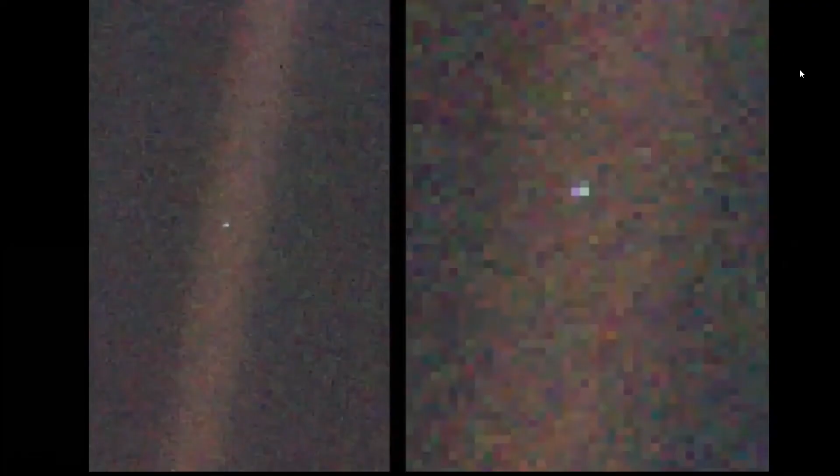I'd like to first take a look at the really big picture and step out. This is a picture that inspired me when I was a young kid. It was an idea Carl Sagan had as the Voyager spacecraft was leaving the solar system after visiting Neptune—they turned around the camera and took a picture back looking at Earth. So this is everything we've known, everything we've loved, even very close at the edge of the solar system, on the grand perspective, everything fits into a single picture. It's kind of a powerful image.

And when we zoom in, it's more than a pixel to us. It's our home, and it's this lovely planet. How we build and how we take care of the planet, even as we think about how we step away from it and venture out into the universe, is super important.

The way we approach a project like space travel would be in collaboration, we believe. In 1936, our founding partners, Skidmore, Owings, and Merrill—SOM—had exactly that same idea. First it was Skidmore and Owings, two architects, who were joined by Merrill, an engineer, shortly thereafter. Ever since that, this has been in the DNA of SOM.

Skidmore and Owings got their first break at the Century of Progress exhibit in Chicago in the mid-1930s. It was a big fair, and they realized this incredible skyride project that you can see on the screen here. It was used by about 5 million people, almost in a time where air travel was not standard. This was probably as close as somebody could go before planes or space travel were readily available—you were in a capsule riding 60 meters up over the water.

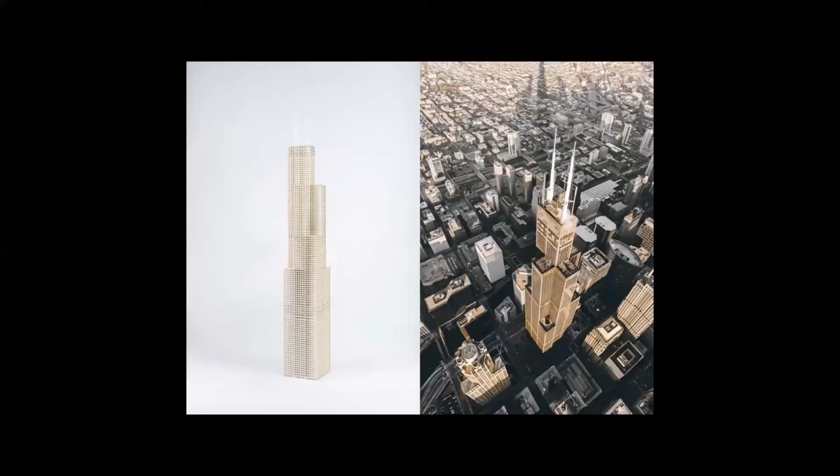Skidmore, Owings, and Merrill, the engineer and the architect, then Fazlur Khan and Bruce Graham, and then all the next generations that came—architects and engineers working together. We believe this setup produces the best architecture and best engineering. But we don't just do that—we also have designers and urban planners on staff. When you look at our architecture, for example the Willis Tower, formerly the Sears Tower, in Chicago, you can see the architecture derives itself out of the structural engineering and vice versa. This is a bundled tube concept from Fazlur Khan, a world-famous engineer of his time.

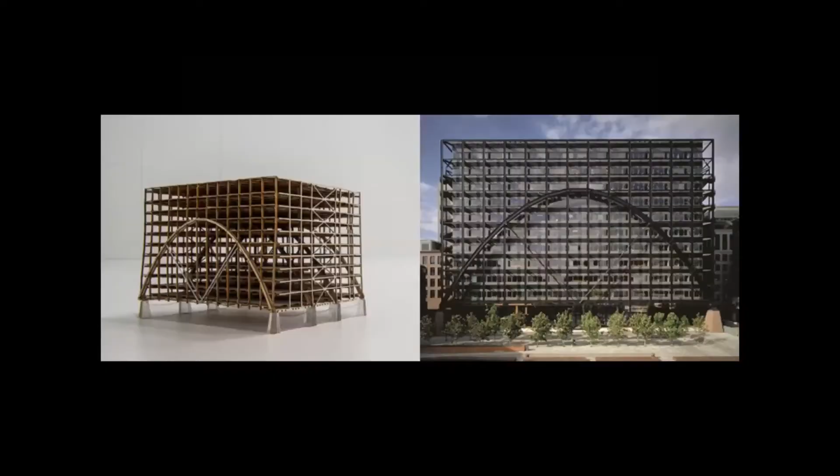This is a great example of how we see a successful project, how we like to work together. Another example that shows this collaboration, which we at SOM really love, is the Broadgate project, the Exchange House in London, 1990. It is a bridge, but it's also a building—you can see how it spans over this big area, which is occupied by train tracks underneath. So again, architects work together with structural engineers in collaboration. We believe space travel is another one of these projects where we have to collaborate in order to have a good outcome.

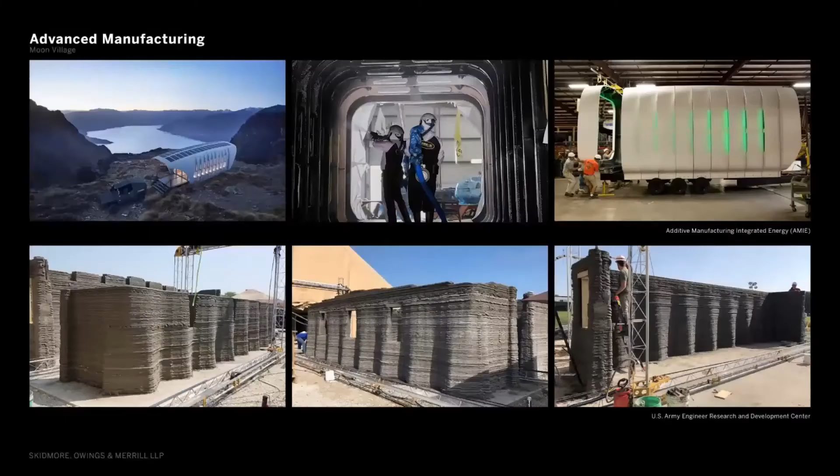Besides project work, we also do a lot of research. We try to stay at the cutting edge of technology, of building production—additive manufacturing that may be applicable later on the Moon is something we're looking into. Ever since computer technology made its way into mainstream architecture and structural engineering, we have been right there with it, and we've always used the tools of the time—whether it was AutoCAD, Revit, Grasshopper nowadays, or all these different types of tools and platforms, we have utilized them.

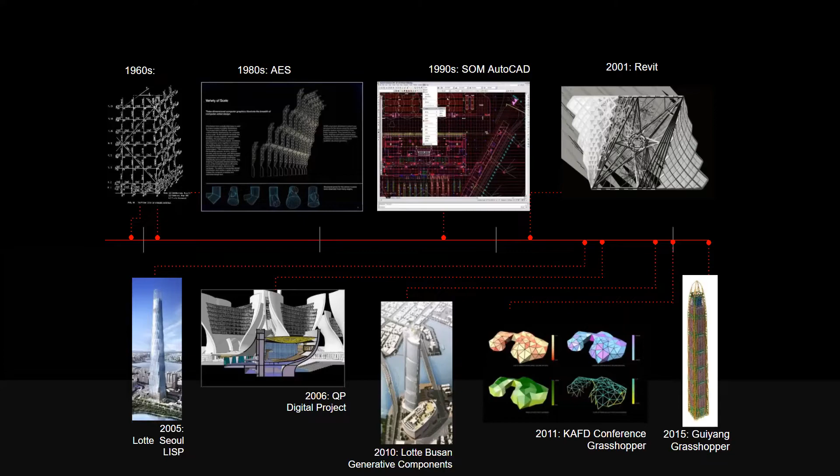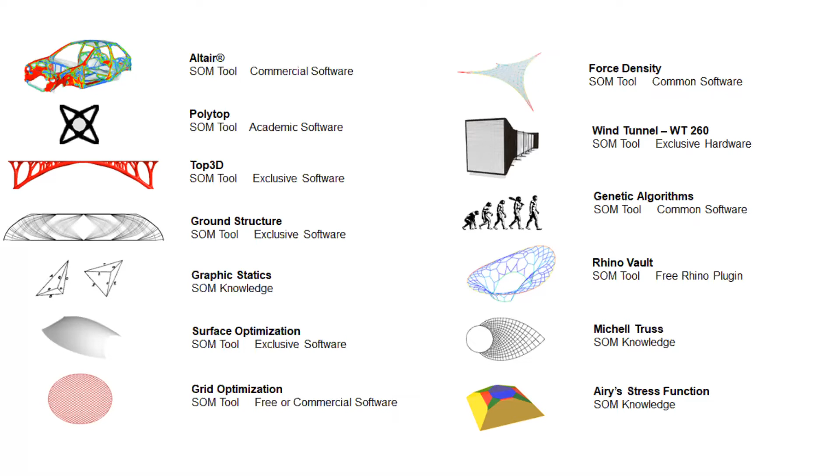However, when there was no tool available to us, we would just develop it ourselves. There's a whole list of tools that were authored by SOM over the years, and they make our engineering usually successful. Architecture profits from this too. A lot of engineering tools have been developed by SOM, and so we're taking this cultural history of our project and our way of working and applying it to designing habitats in outer space.

This wonderful idea that Jan Werner just described, of taking the inspiration of going to space together, is personified in the International Space Station, and then applying it to how we could live on the moon. Instead of going to the moon as adversaries competing, if we all pool our resources together to create a common infrastructure, then everybody can share in it, and we could all go to the moon and explore and settle it together. So SOM, in partnership with the European Space Agency and MIT, for the last two years, we have been exploring ways to give form to this idea of how we would go to the moon together.

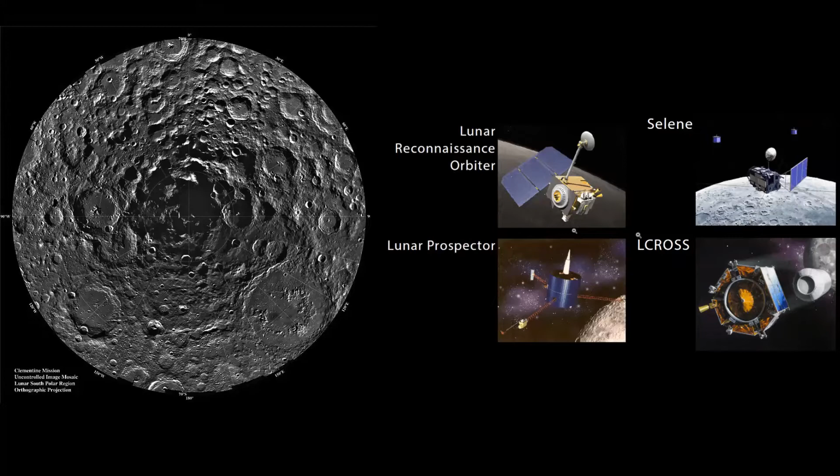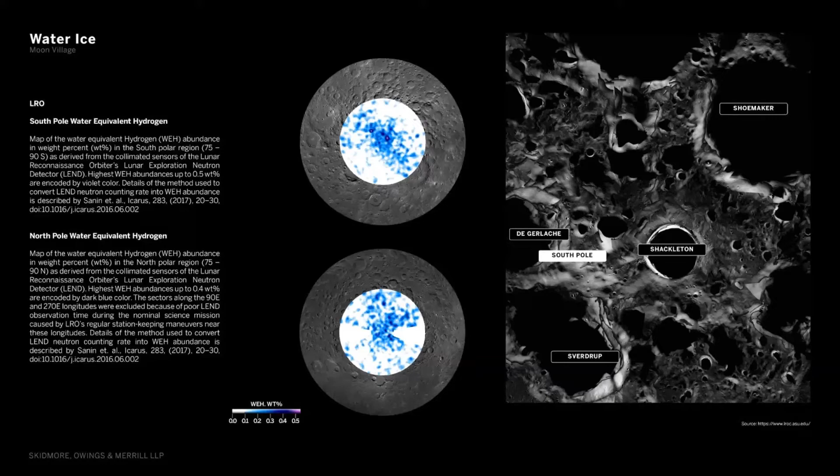We have chosen a site. Over the last 20 years, over many missions by different countries, we've accumulated quite a bit of evidence that the most interesting bits of the moon are the two poles, mainly because, the way the moon's orbit works, they have these permanently shaded regions where the sun never shines, or hasn't shone for billions of years. In these permanently shaded regions, there's very high evidence now from these many missions that there's ice, most likely water ice and other volatiles permanently frozen in a big cache of reserves.

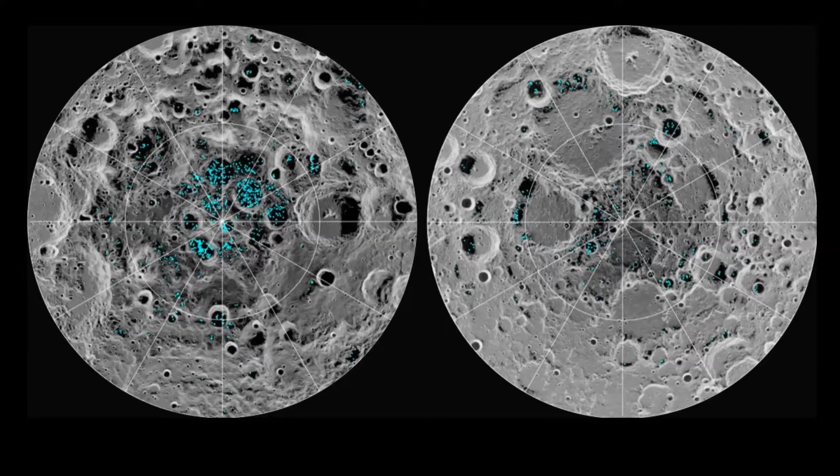The rest of the moon, on the equatorial region, where the sun shines most of the time, everything boils off, so it's bone dry. In fact, if we go on the moon and find concrete, it would be worthwhile to mine it for its water. But on the poles, we believe the water is stored in vast amounts.

In particular, if we zoom into the South Pole, besides the permanently shaded regions, also very nearby there are high points that coincidentally are exposed to almost permanent sunlight, quite the opposite. Those are really good places to harvest solar energy to create electricity. So you have water, which is interesting because it provides a resource, but it's also very interesting scientifically because it locks in the history of the solar system for the last four billion years. So it's interesting both as a resource and as an object of scientific study.

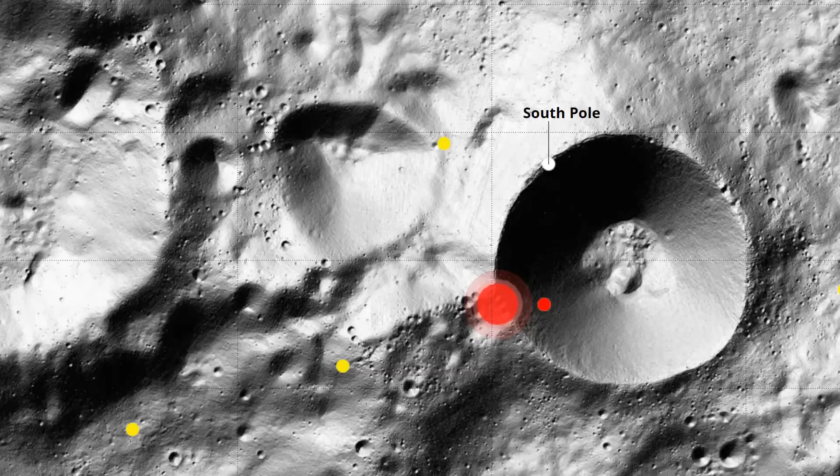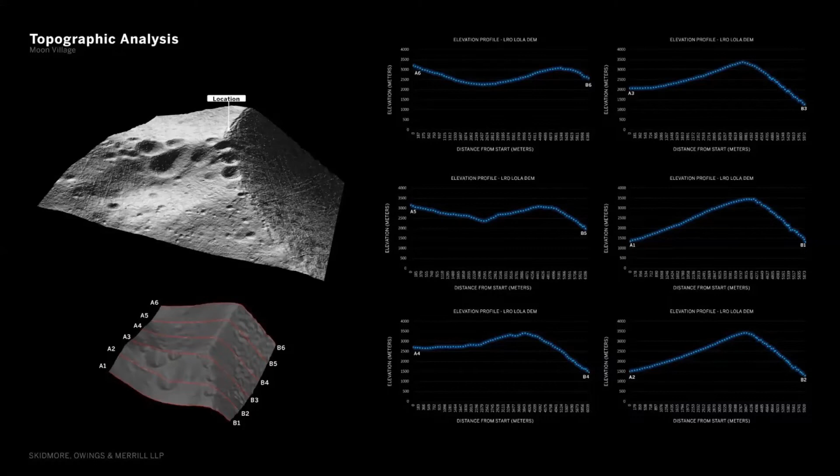And it's right next to areas with permanent light. If you look at it, there's this South Pole, and then there's this giant crater called Shackleton Crater, about four kilometers deep, about the length of Manhattan from side to side, so pretty big. But on the rims of it there are these smaller craters, which you see here on the left, where it would be easier to land and explore. You have, very near to each other, both permanently shaded regions and permanently light-exposed regions. We've studied the topography very well. There's a lot of good information, so you can build a very detailed map of it.

After picking a site, we wanted to start imagining how you would build a moon village or settlement that keeps growing over time. It's not just a one-off event.

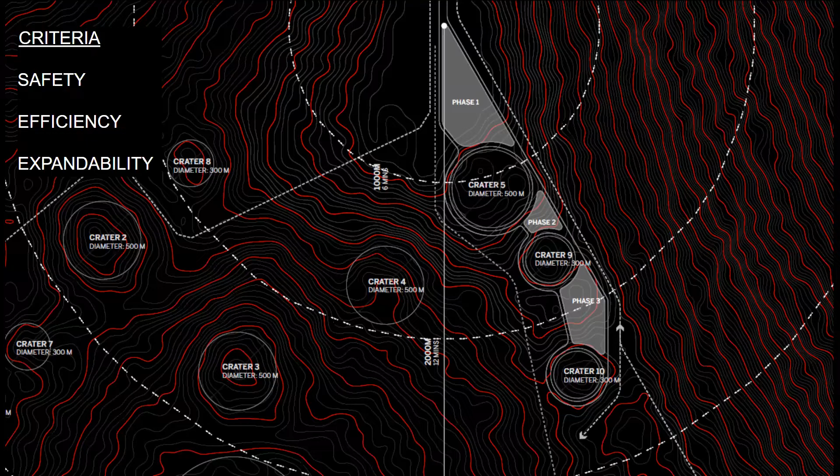When you set off to create a new urban environment, you have some criteria. You have to have safety, which is very important, because it's a very harsh environment. So all of your modules and habitats must be linked together, so if one of them goes off, it doesn't cut off the rest of your settlement from each other. It must be efficient, because especially in the beginning, everything has to be brought from Earth, and as we know, space travel is quite expensive.

So you must not lay out your infrastructure in an inefficient way. And it must be easily expandable, because our idea and the goal here is to keep growing in the future.

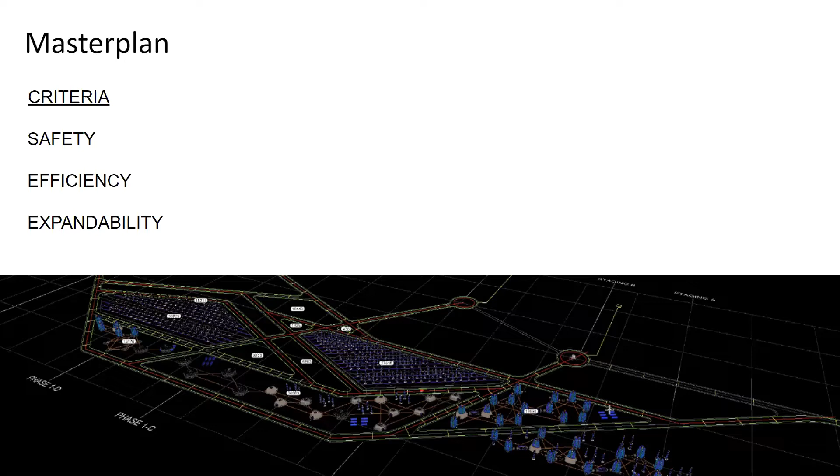So we looked at several precedents of how humans have settled on Earth before. Many places you have grid plans, both in South America, all laid out based on the law of the Indies, and then the Jeffersonian grid that dominates the American Midwest, that started expanding from the Appalachian Mountains on. These provide a lot of redundancy, safety, and expandability, but they also create, if you want habitats connected together, a lot of closed spaces you can't access.

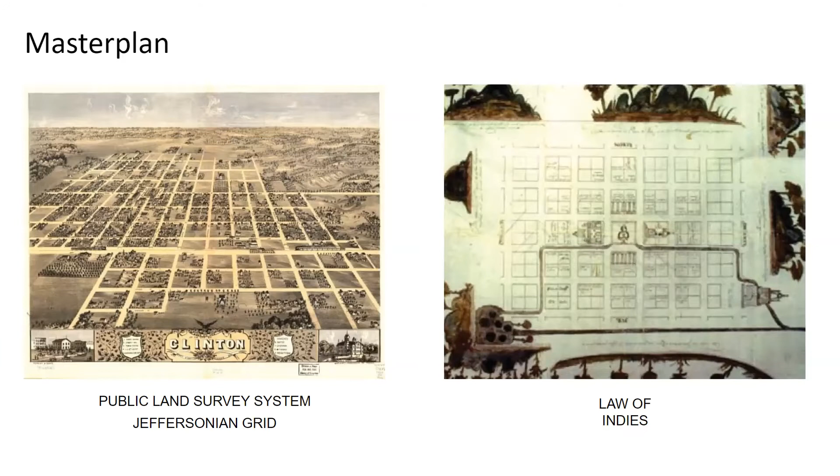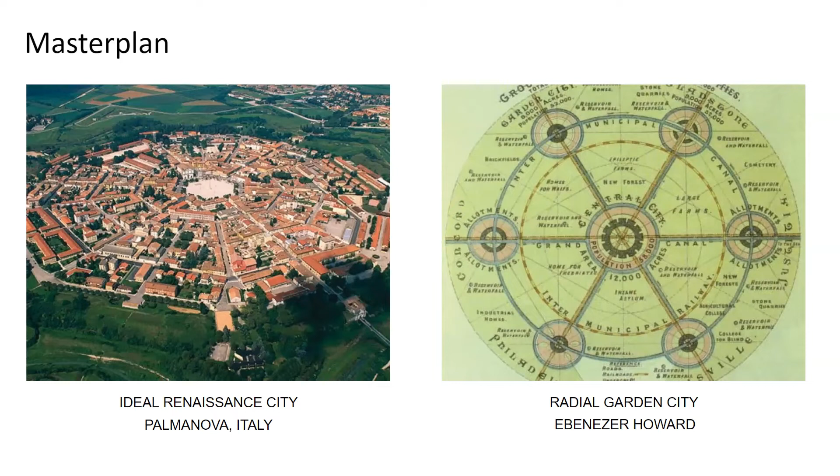We also looked at other utopian urban planning ideas, the radial garden city from the early industrial revolution, or the ideal Renaissance cities from Italy. But we settled on this idea of the linear city, first made popular by the Spanish architect Arturo Soria, and then given its most famous form by Le Corbusier. This idea of how you would use modern industrial society and lay it out in an efficient way.

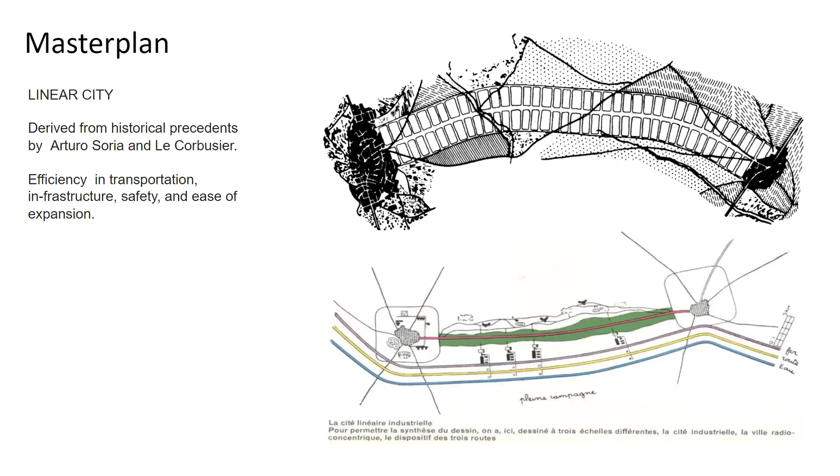So you have these bands of development where you have the infrastructure and the industry interspersed with the habitats. If you take this idea, you could have a band of habitats. Here in this master plan, the rim of the crater is east-west, left to right, and the big crater is on the south. So on the perimeter of the crater, you could lay out all of your habitats, and they could grow in both directions. Then next to them, you could have all the infrastructure you need, the solar panels, the resource extraction that grow with the habitat.

And finally, you can have an activities band. You can imagine the different players coming to the Moon Village. Say, for example, you have a government agency that wants to set up an exploration and go roving around to explore the region. They need a staging ground. Right next to them could be a tourist company that wants to bring tourists to the moon, and they could have all the playgrounds there where you would come in and experience fun, new ways, like lunar Olympic Games or things like that.

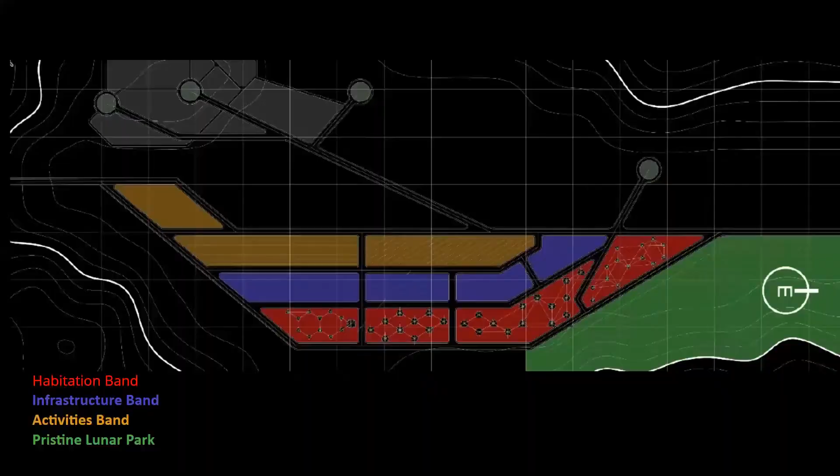And we had this idea that we probably want to have a piece of undisturbed moon left over, so that as you move around and lay tracks and make a human mess, there's always a piece of the pristine moon settled as a sort of moon park. And the best place for it is in the direction of the Earth. Because of the moon's rotation, Earth is always sitting in one spot on the horizon. It never moves, and it's always there in one location. In our settlement, it's to the right over here.

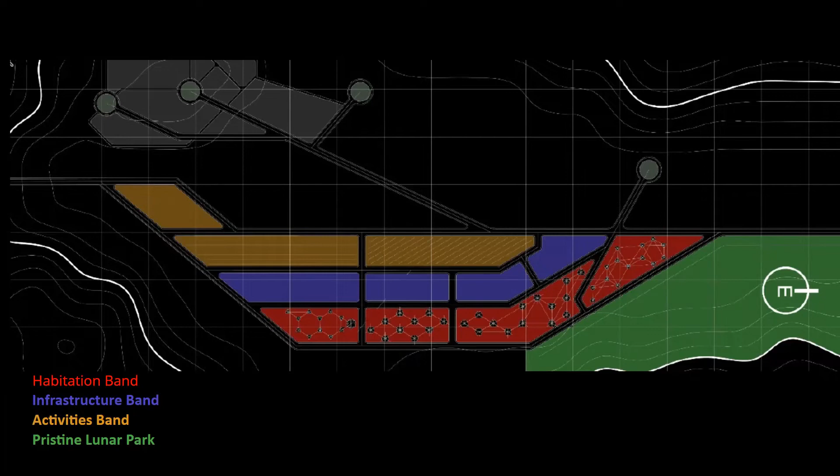And so we had this idea that if we keep this piece of pristine moon, there would be this poetry that everybody from each habitat would look on the untouched moon and then see behind it the beautiful Earth spinning around in the sky, to give it a sense of identity and beauty in addition to the rest. So if you step back in the settlement a little bit, going down into the crater, for example, you would see your settlement with the Earth behind it, always in this beautiful image.

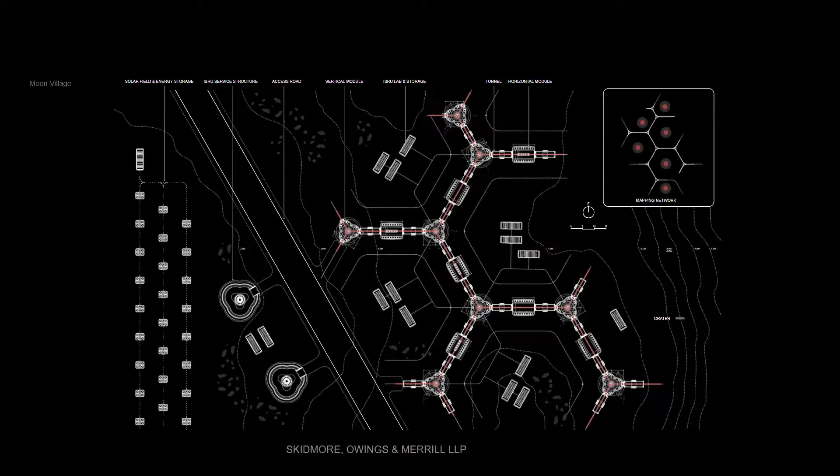And so this is sort of our idea of the master plan. We started laying out our habitats and how you could aggregate them together in this linear fashion. This is a higher up rendering from here. In this case, the crater wall is on the upper part, and you see the band of habitats growing, and then the solar panels and other infrastructure that's holding the life support.

The differences that we as engineers and architects face on Earth versus the Moon couldn't be starker. The Earth is more than 3.5 times bigger than the Moon. The average temperatures on the Moon are significantly colder and significantly hotter. As you can see, it dips down to minus 240 degrees Celsius and goes up to 127 degrees Celsius at its peak. So the range that we have to accommodate with our structures is significantly bigger than on Earth.

The force of gravity is obviously much, much less, about 1/6. And interestingly, also the lunar day is significantly longer, as we all know, about 30 days. So that is also an important criteria when it comes to the location, finding a good site, as Georgi already talked about, for harvesting the solar energy with PV cells.

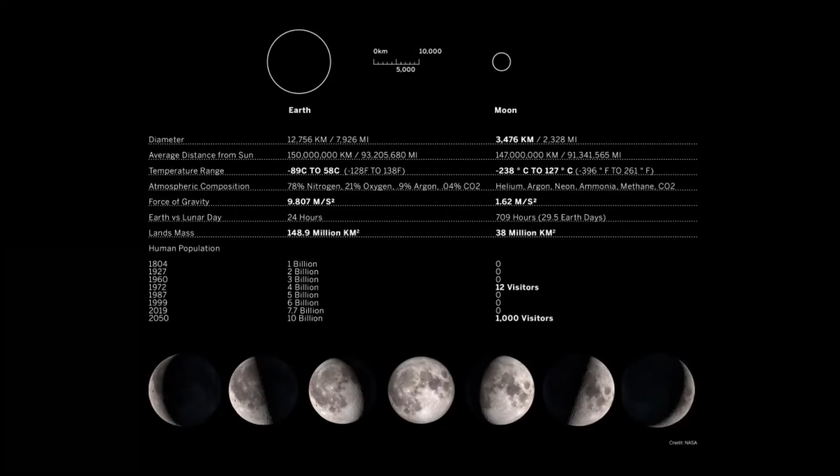In terms of what the structures will have to withstand, on Earth typically we have gravity. On the Moon, gravity is not the issue. On the Moon, it is actually creating pressure for human life. To withstand these forces, the systems that we have to construct on the Moon will have to be capable of withstanding probably 10 times the forces that we have to have them sustain on Earth. And so that is a significant difference that especially structural engineers have to keep in mind when they design on the Moon.

We also have radiation on the Moon that we have to be very, very cognizant of. There's a low-level radiation that is constant, but there's also so-called solar flares that happen once in a while and can be predicted and can be, like the weather, foreseen. And astronauts will have to take cover during these events. And so our structures also have to serve as shelters to protect the astronauts from radiation.

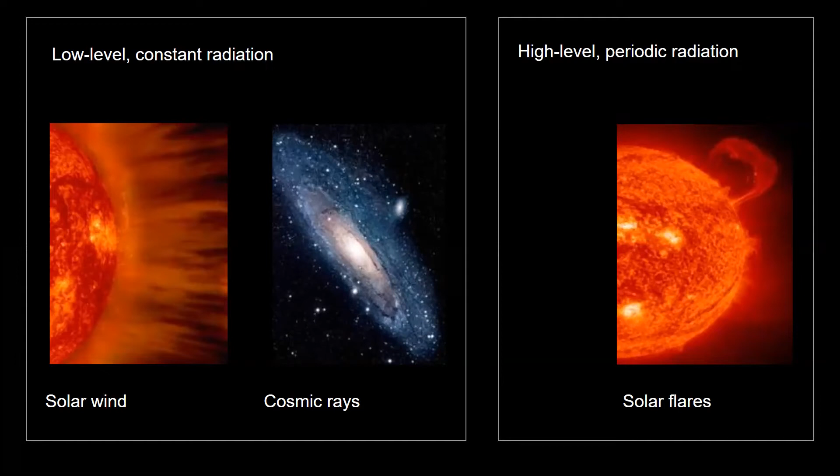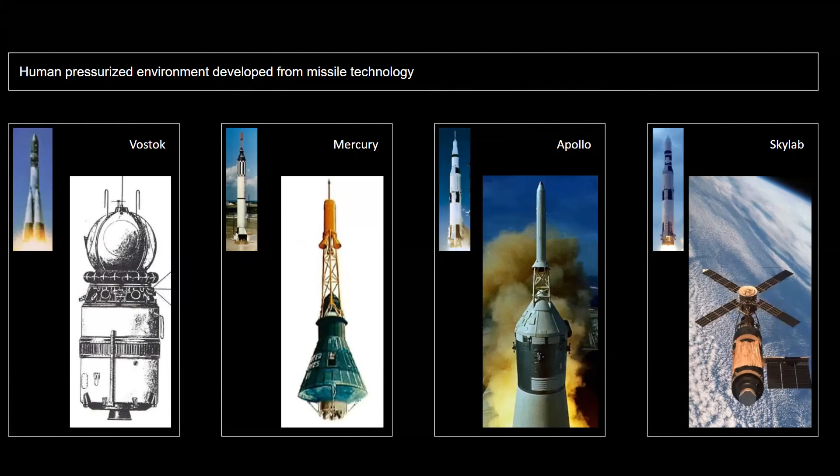Traditionally, spaceships were constructed as gigantic fuel assemblies with a little bit of payload on top. You can see the three types of spaceships we've seen in the past: the Vostok, the Mercury, and the Apollo, where there's a tiny little last stage at the top of the rocket ship that actually made it into orbit. Skylab also had its components transported into space at the tip of a rocket ship. And this is a traditional concept of taking rigid components into space that do not change their shape. The outer shape conforms to aerodynamic and structural requirements, and there's no flexibility.

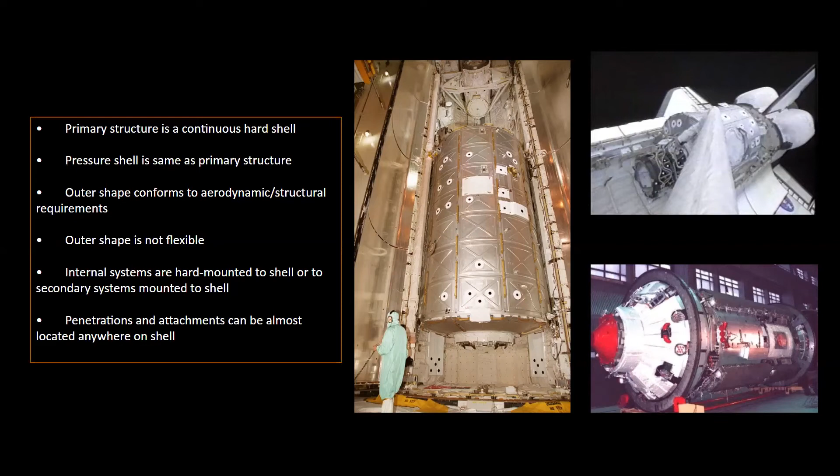This kind of old school concept has been changed, or there has been an evolution in the 1990s to be a little bit more flexible. NASA developed a system where you had a rigid core that would fit beautifully into spaceship compartments, but there was also an additional flexible membrane that could expand once the components were in space. So this was a way to be more efficient and create more space without having to build bigger rocket ships.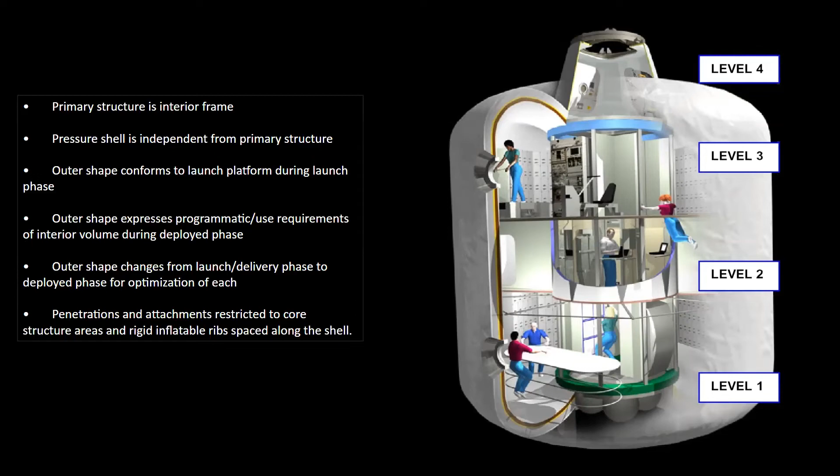And to summarize this, there are different classes of systems that scientists categorize. Number one is the class with the rigid outer shell that doesn't expand. Class two is the latest development from the 1990s, where we have flexible outer components that can significantly change the shape of the module and give you more space. And class three is the future, probably, where we use in situ material on the moon to build structures, so we don't have to take building materials up to space, which obviously is very uneconomic.

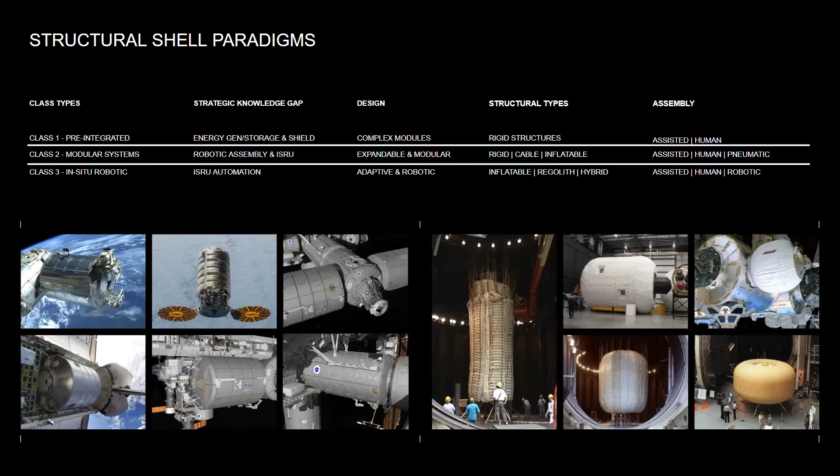So understanding all of these considerations, we synthesized and developed a scheme for the individual module. So we developed the architecture of this module.

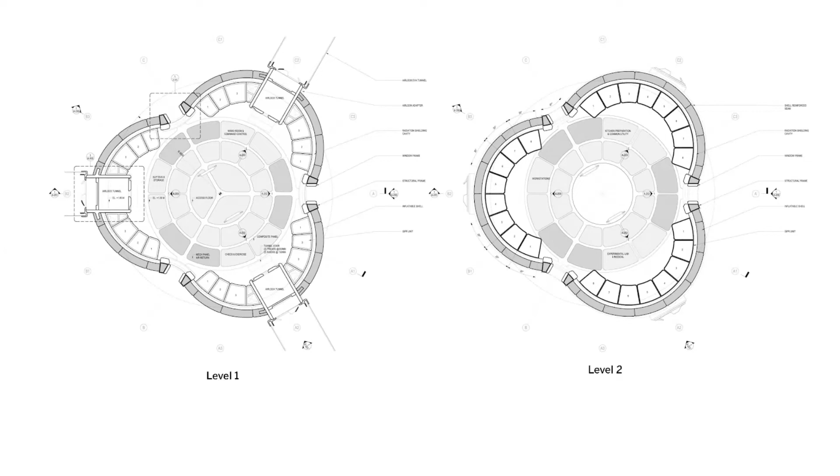Up on the second floor, we find the lab and research area, and you make your way up in the center, which has a ladder so you can guide your way up.

On the third floor, we have the sleeping quarters of the crew, where they can sleep, live, and entertain themselves. And up on the very top, the 4th floor, we have an experimental greenhouse where the crew is trying to learn, hopefully, how to grow plants while being on the moon.

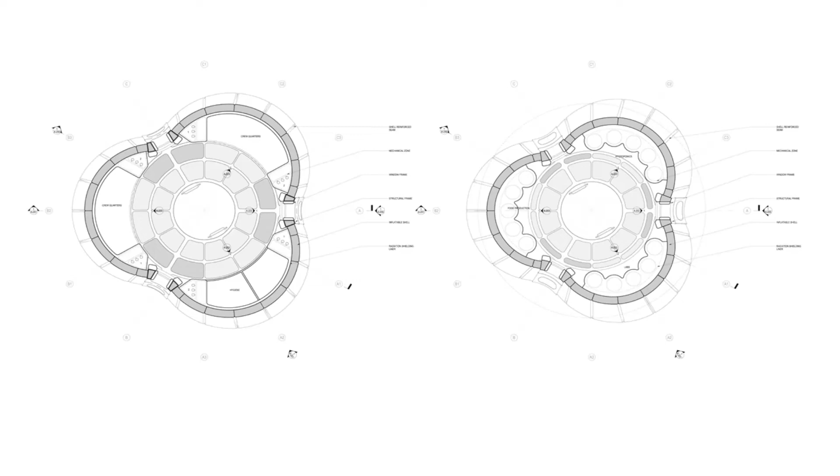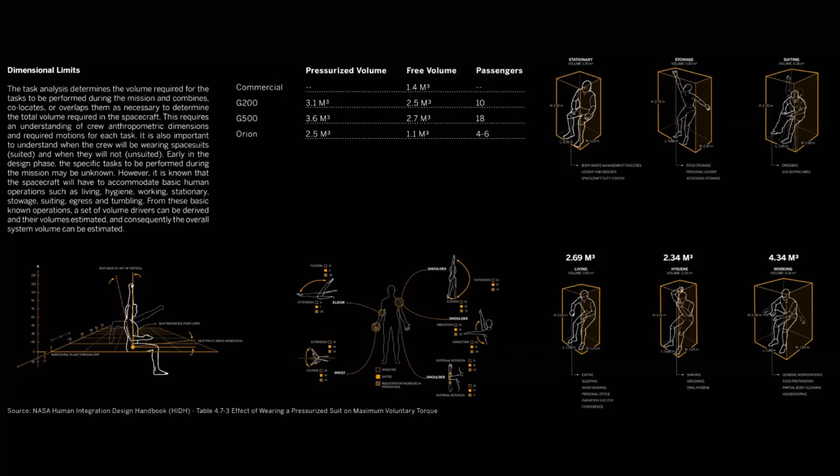On the moon or in a module like this, every inch matters, every ounce matters, so the study of the human body is particularly important. Taking into consideration the reaches and typical dimensions of the human body, we designed and programmed the system, and you can see how it's broken down into the circulation in the center, which is a new idea here, to have a rigid frame around it but circulation in the center.

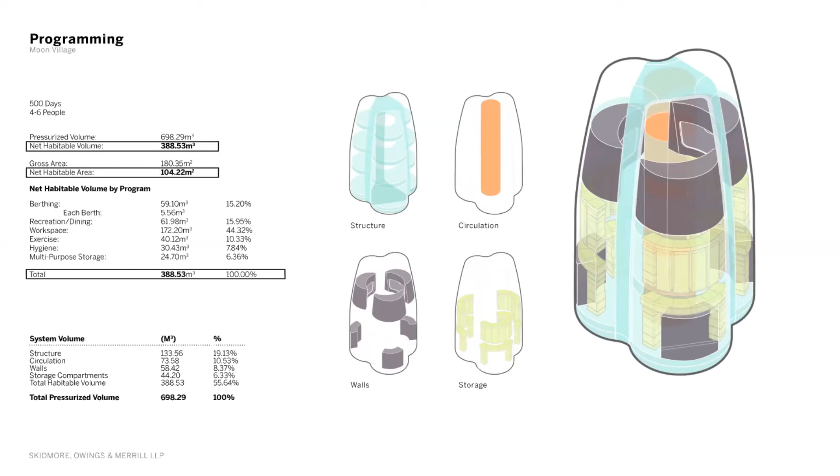So we looked at the architecture of this module. Now we'd like to take a closer look at how the architecture could be, with what kind of components it could be built.

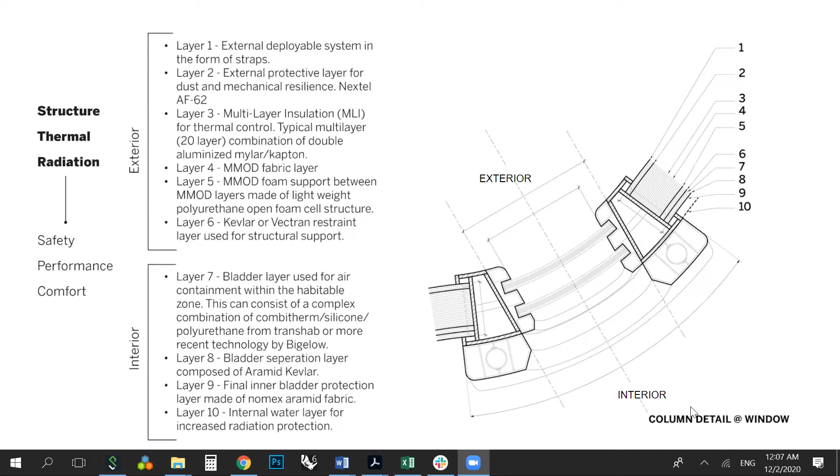Zooming in further into the details, we took the research done for TransHab in the 90s on the different layers an expandable shell needs in order to survive and function properly. There's typically a layer of Kevlar woven together like a basket that holds the pressure, which is the main structural layer. Then there are several layers of insulation. On the very outside is micrometeorite protection against particles that might hit from outer space. On the inside are several bladders that actually hold the atmosphere, and finally, on the very inside, is the finish that astronauts would come in touch with and experience.

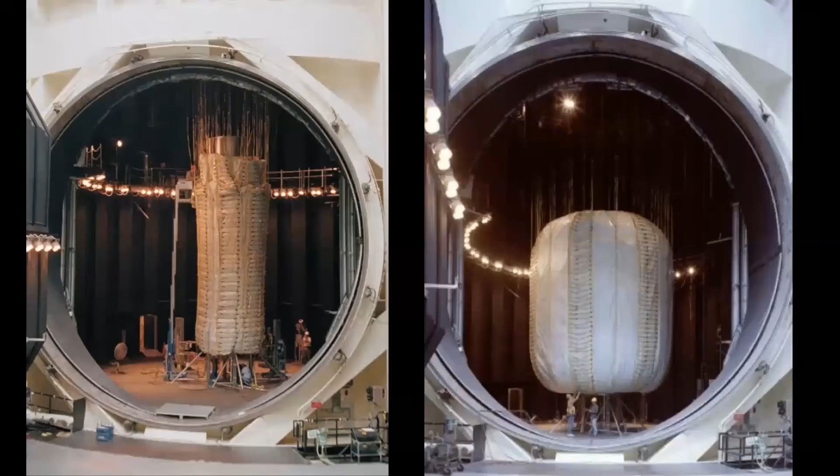On TransHab, these images from the 90s, they developed strategies for folding this complicated multi-layered shell into the rocket and how it would expand. This is a full scale test—you can see the scale with the individual people—in a large vacuum chamber down in Houston where they could test it in vacuum and how it would inflate and behave.

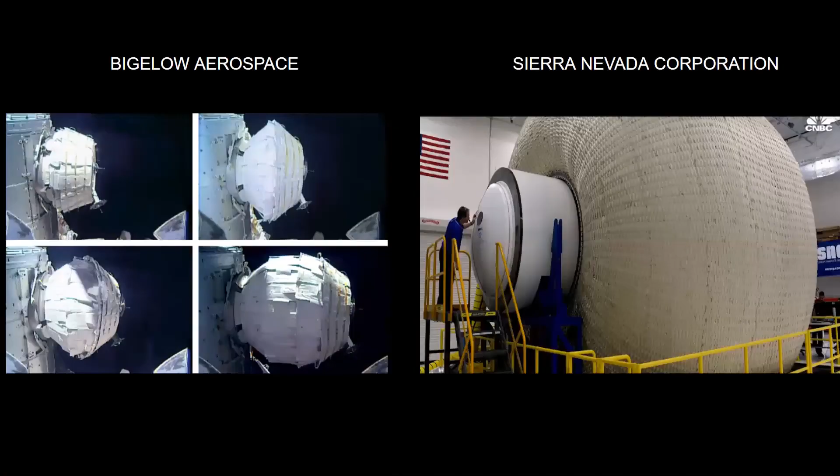This technology has been moved forward in the last few years by several private companies. There's actually a demonstration of this technology attached to the International Space Station right now, a module by Bigelow Aerospace. Other companies like Sierra Nevada have built full-scale mock-ups of how this inflatable structure could be. You can see both the original TransHab and these two are quite symmetrical and simple in shape, yet it's very complicated how the weave of the structural layer could happen.

It's a really difficult material to model. It's not like a solid piece of steel or concrete that you fairly know how it behaves and can predict and model. It's very non-linear because the molecules themselves are stretchy, and then they're woven into fibers and yarns.

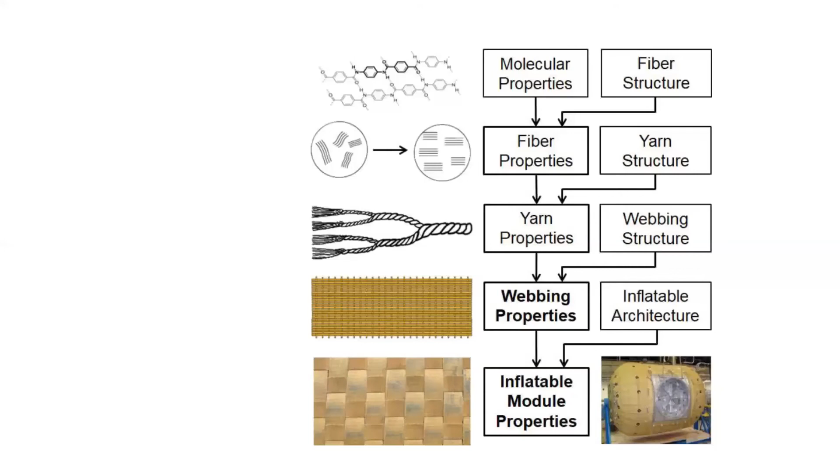That then go into the webbing. In each layer there's give and take, and the mechanical behavior of the material is very difficult. So we're looking at different ways we could weave the mesh together to create this complicated surface we're imagining out of the tripartite shell for our module. We're also testing it with finite element structural analysis to make sure we're modeling the shape of the inflated shell correctly, and that all the forces can be accommodated with the thin Kevlar strips.

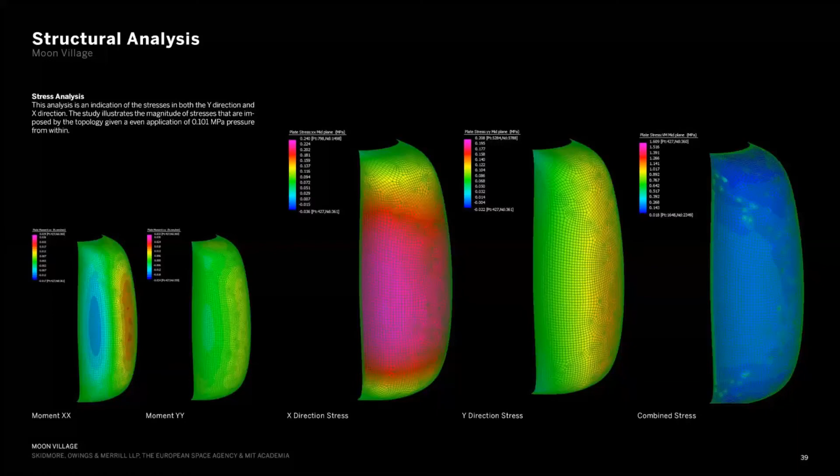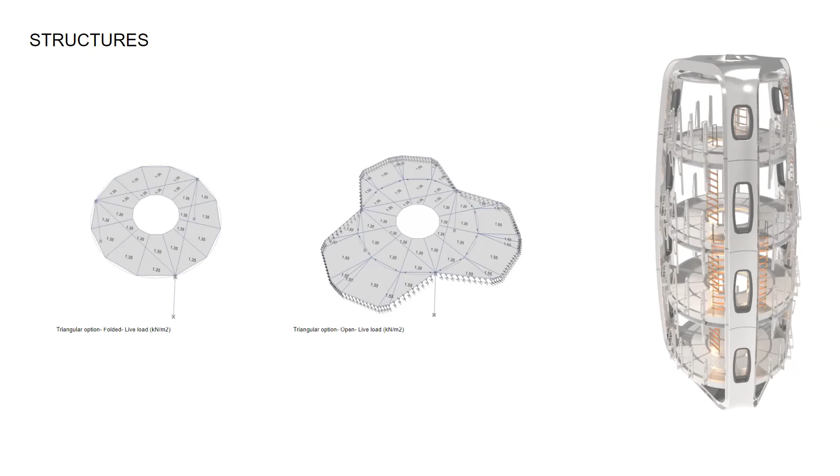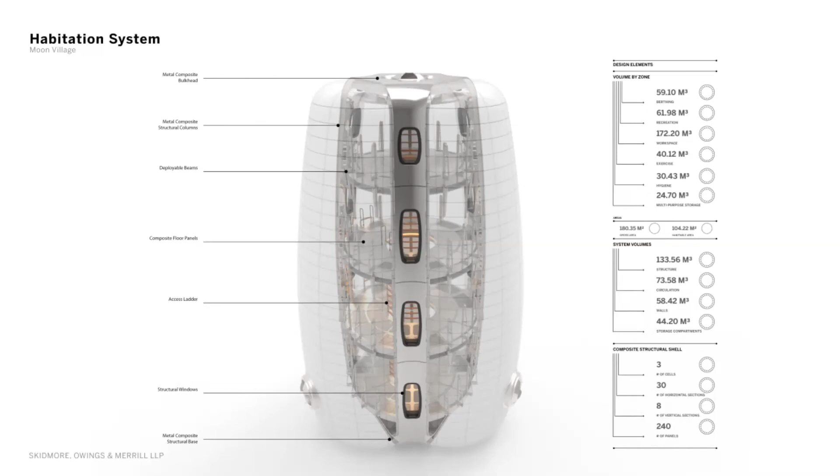In addition to studying the shell in detail, we're also studying how the floors and all the rigid structures would unfold, because they have to be packed closely during launch and transfer. Once the module makes it to the moon, we're studying how we could cantilever and fold out the floors in three dimensions. In addition to the floors, all the rigid furnishings, the crew quarters, the lab equipment, everything would be expanded and moved into its final configuration along the open shell, freeing up the middle for circulation and habitable volume.

So again, here you see the final configuration of the shell. The very important windows we talked about, so you could see and experience the outside, are built into the rigid frame, where it's a lot easier to introduce openings and attachments rather than into the woven shell that has to be inflated and moving. We're reserving that only for the connections down at ground level.

And then we're imagining how you could start multiplying these. In the beginning, the very first one obviously has to have everything you need, and we've designed it so that it has both the working and living example. As you start adding more, just like on Earth, you could imagine each one would start taking on a specific function and specializing. So you could have one module that's the habitat, another that's the working environments, labs and workshops, another that could be a hotel for temporary visitors, another could be storage.

Additionally, a very important activity on the moon would be studying how we could use the resources there. Here we could experiment with 3D printing, for example, a hardened shell made out of the local materials and regolith on the moon, in order to protect a portion of it from radiation events like solar flares. And then later on, as the moon village is growing, another interesting activity would be to try to learn how to build and construct full habitats on the surface of the moon out of the local resources.